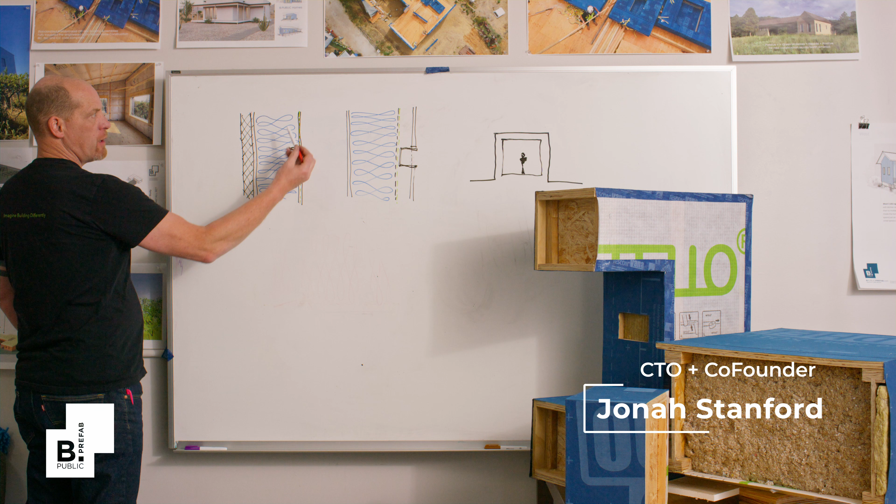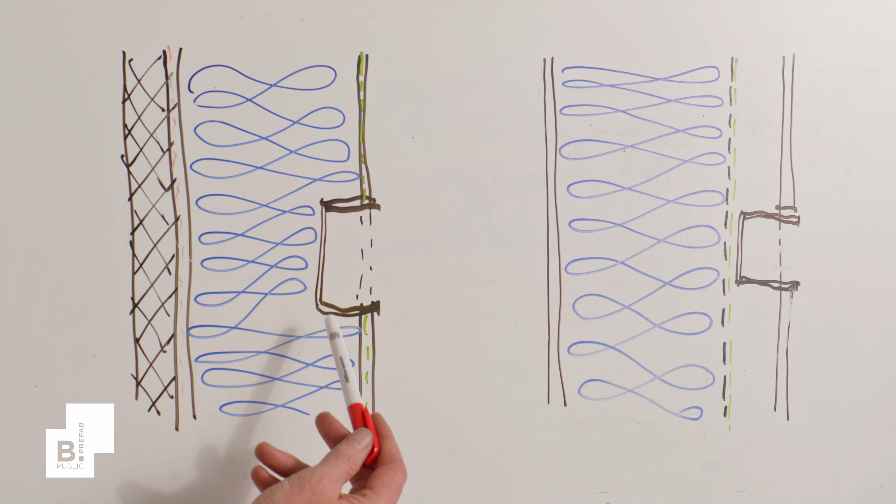In our prescriptive code assembly, just to go over what this makeup is: typically it's a sheetrock, which is commonly what's considered an air barrier in most residential construction. But of course it's not all that consistent, because we have electrical receptacles and lighting fixtures and things like that all mounted and penetrating it, and of course they're all open.

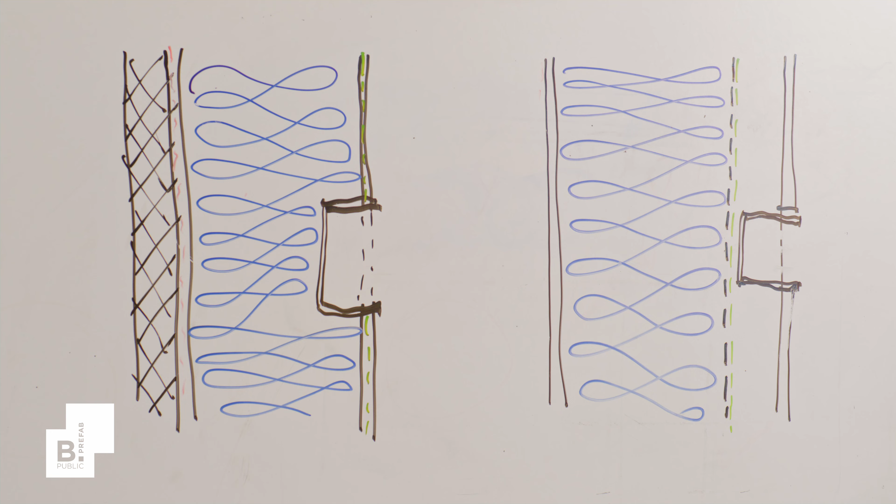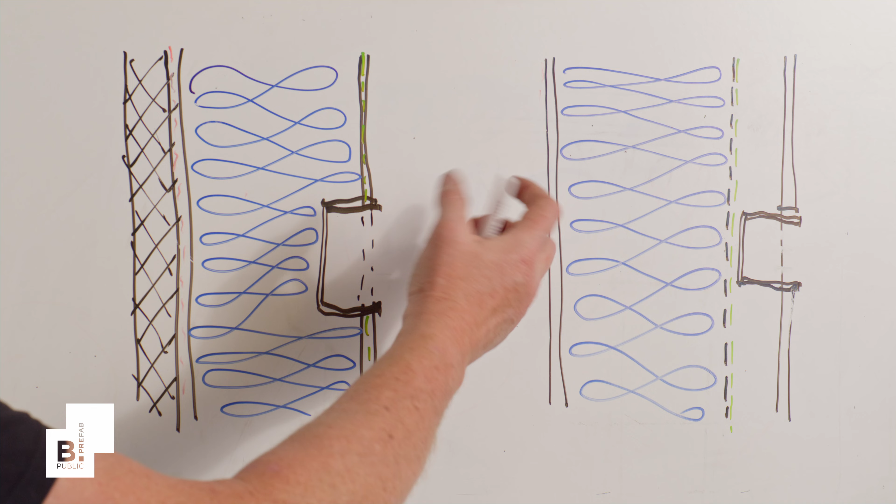The next part within this assembly would be our framing or cavity. Typically, again, in residential construction in North America it's fiberglass. Fiberglass, as you know, you can blow air right through really, really easily, and so it is really prone to convection. So if we have warm air on this side, just from the nature of the heating of the house, coming in through these leaks that are inevitably there, then there's a potential for a lot of convection.

So that's coming over and it's able to transport that moist air to the back of this exterior sheathing, which, as we learned, when warm air hits a cold surface, water forms. And so that's where water is forming on the inside of that exterior sheathing. And so this is part of the prescriptive response to that.

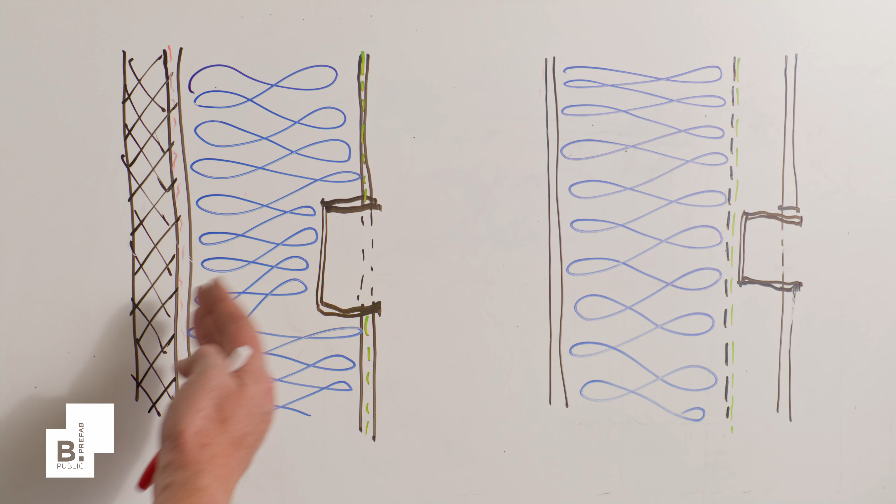Instead of trying to address the building science and here what the root causes are, they're prescribing a rigid insulation or continuous insulation on the exterior. Most commonly that's petroleum-based, closed-cell insulation or rigid insulation. And so that is effectively dropping that dew point.

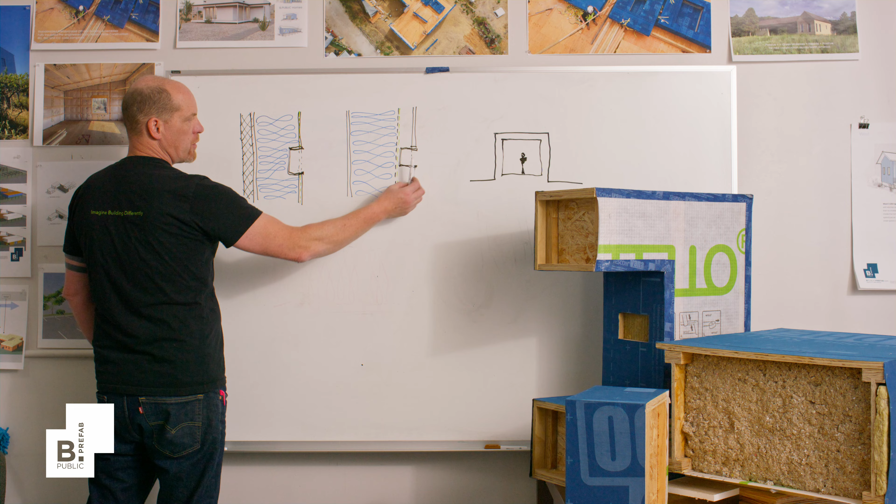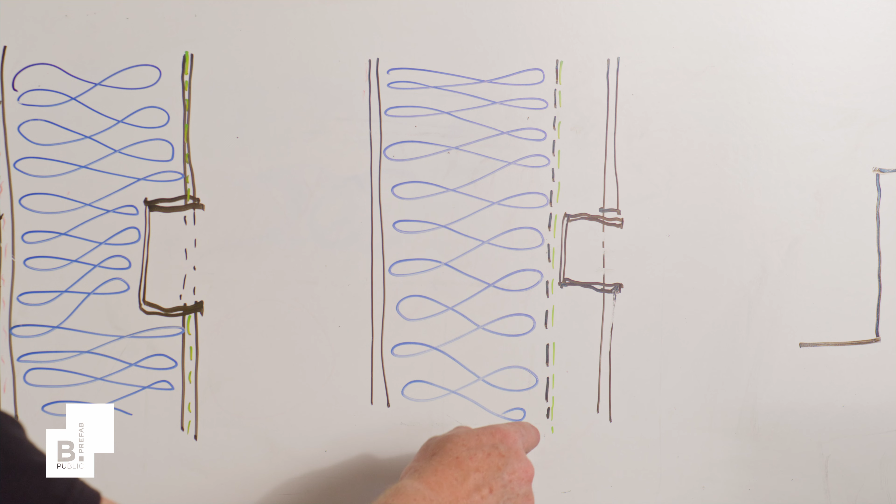For the B-Public assembly, again, we have the same sheetrock used on the inside with the electrical fixtures or J-boxes. The big difference is that all of that is on the inside of our air barrier. So our air barrier is continuous and uninterrupted, allowing a lot of flexibility for these interior finishes to happen without compromising the overall building performance or building science.

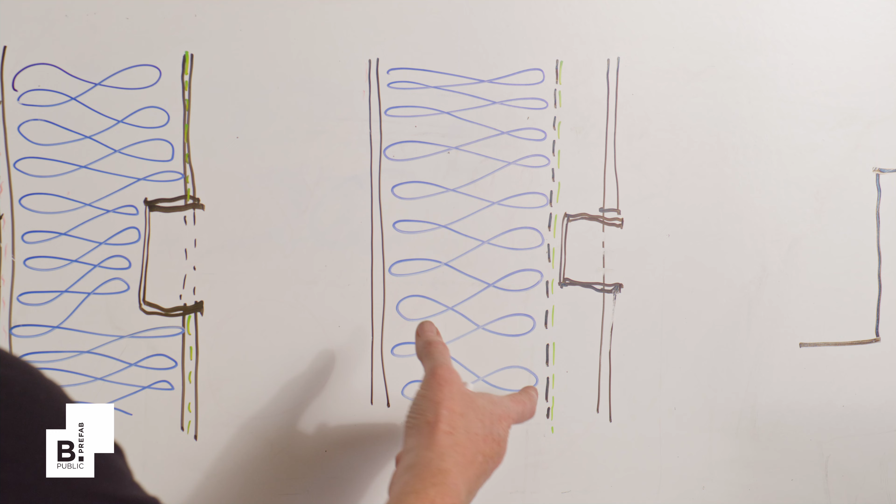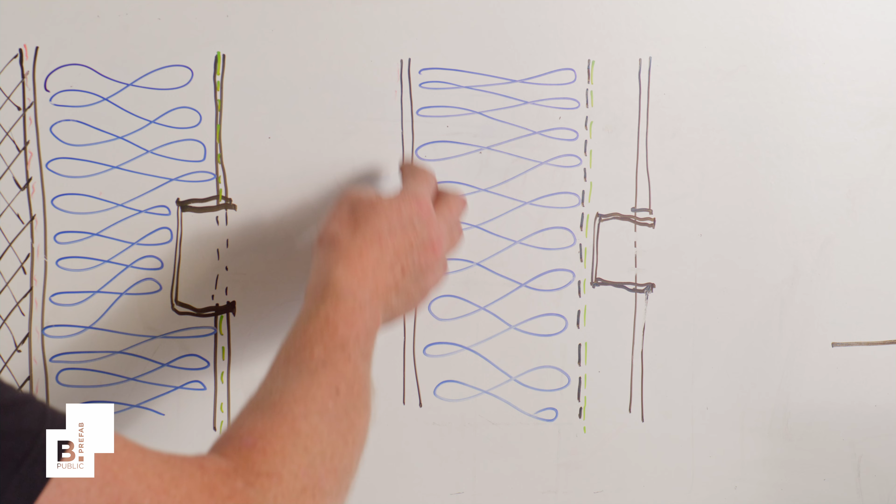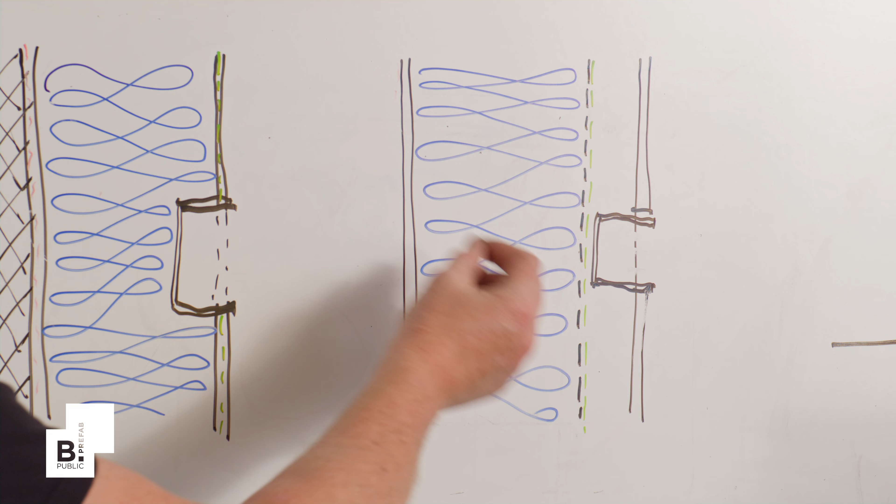Then moving to the cavity side of that air barrier, we're using cellulose insulation, so it has quite a bit of capacity for absorbing moisture. And then coming to the exterior with our structural sheathing, it might be the same as we have over here, but because we've limited the amount of vapor that's able to come through it, we've got a lot less condensation here. And the big part is that it's vapor open, so it's able to dry from both sides of that vapor control layer.